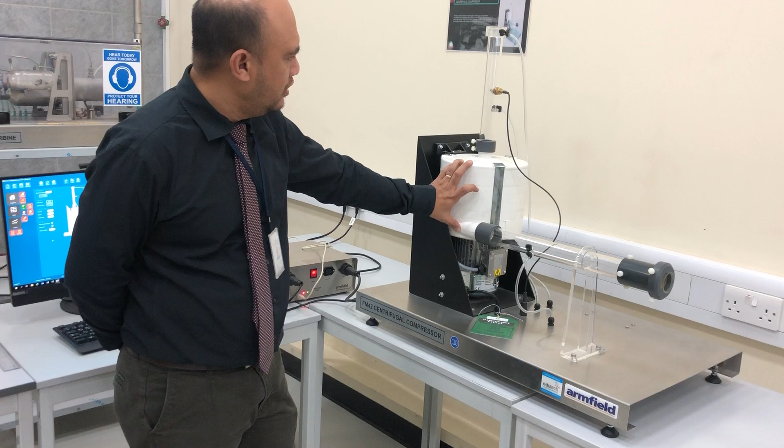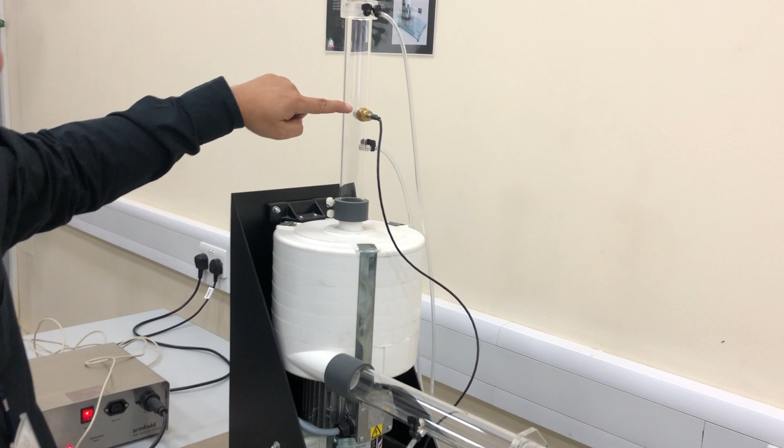So we'll be using this equipment. We have this 7-stage centrifugal compressor, with the inlet and outlet here. We have one orifice at the inlet, a temperature sensor, and the outlet aperture.

Of the compressor, we can use this string to control the exit, or the outlet of our compressor. So this centrifugal compressor is interfacing with our software here.

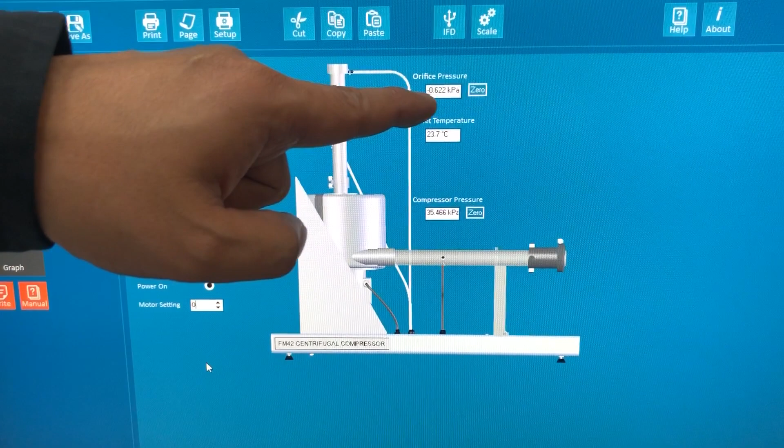This software can control the compressor as well as take the reading or data provided by our equipment. As you can see, you have the diagram where you can get the orifice pressure at the inlet, the inlet temperature, and the compressor pressure inside the 7-stage compressor.

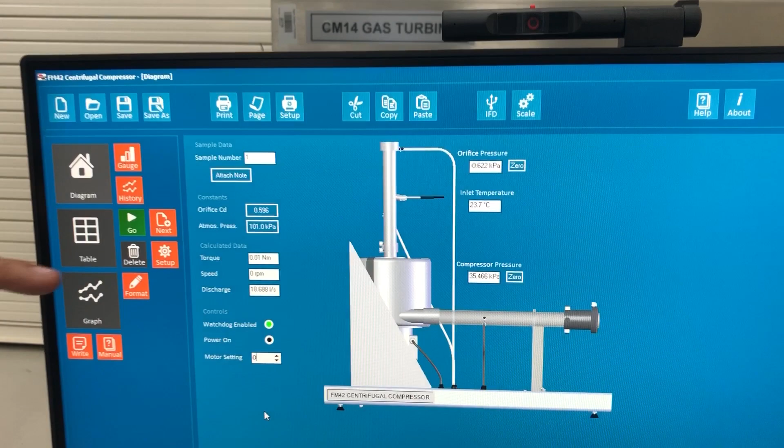Then you have here the torque, the speed, and the discharge in liters per second. So everything will be given by this software.

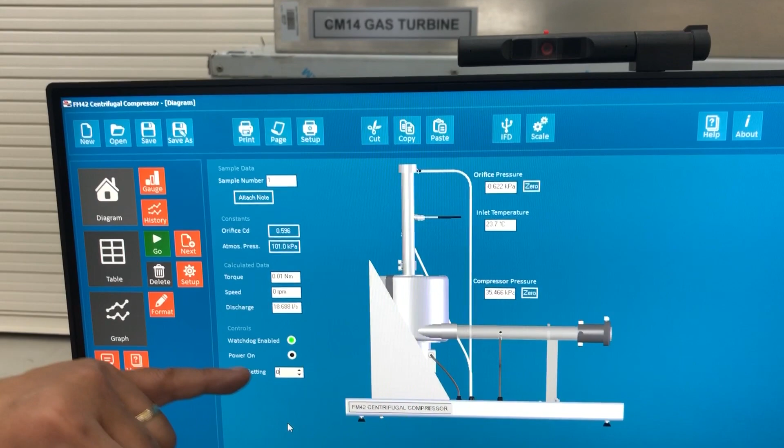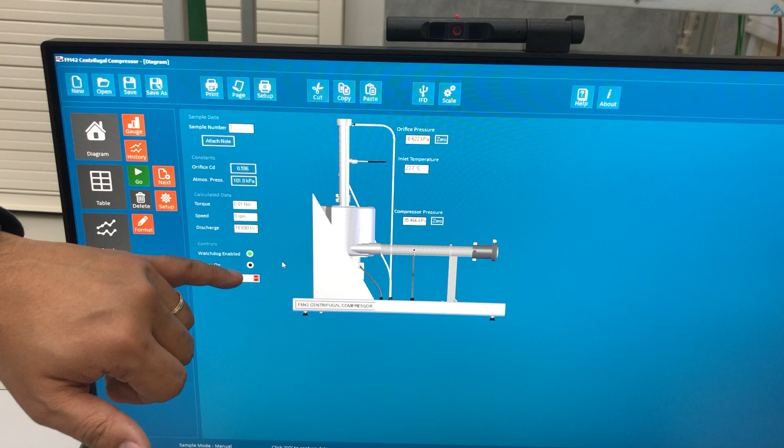So also the control. First, as you will see, watchdog enabled is green, power on. So in switching on the compressor, you need to press this one. Once it is on, black dot means the power is on. Our equipment is in the on position.

Now the motor setting will set the speed of our compressor. So let's try it at 100% running.

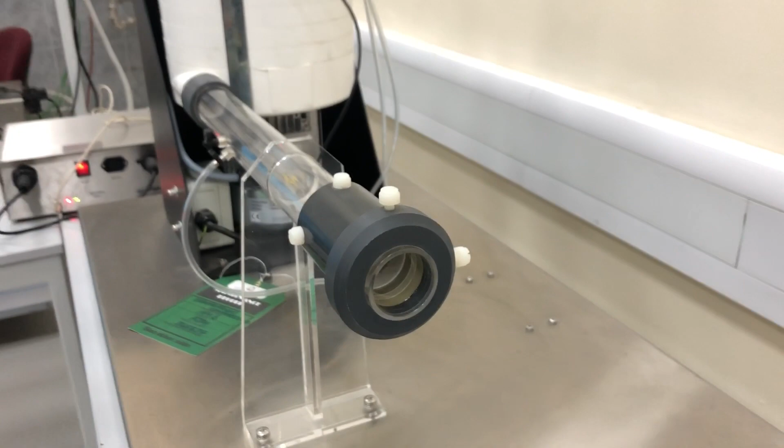So our aperture is fully open.

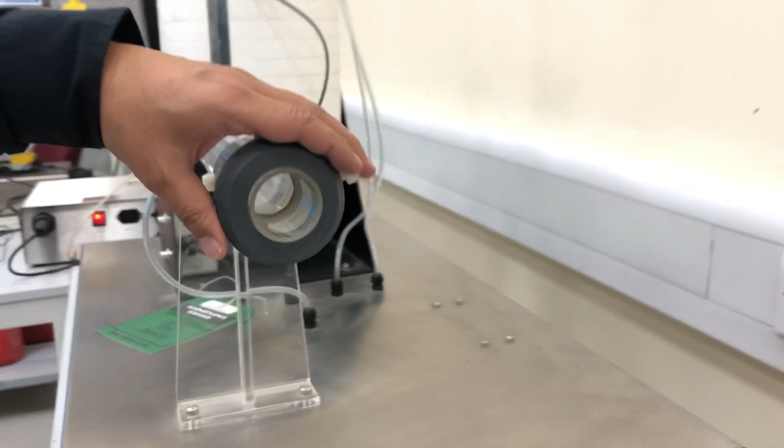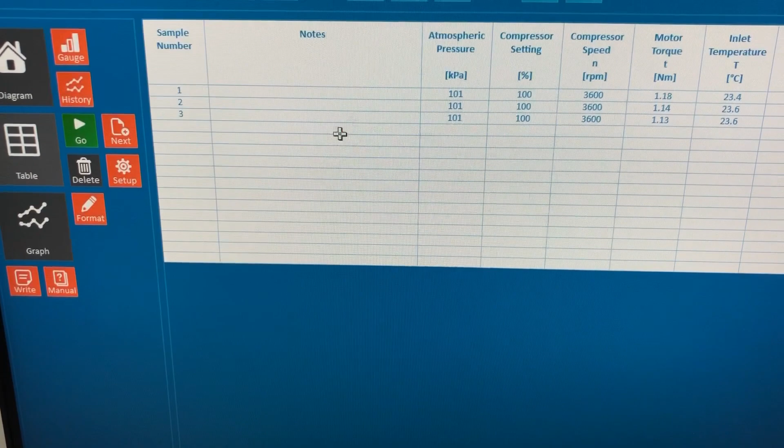Now on the software, you have here the green button where you can take your reading. By pressing this as go, you can take your reading here on the software.

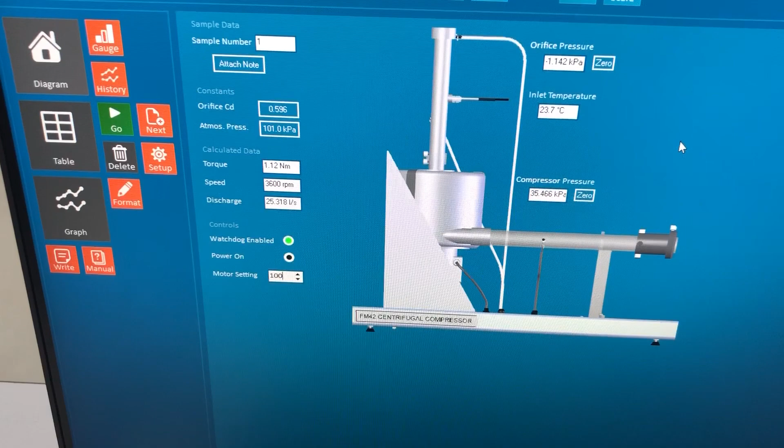So let's start taking the actual reading of the experiment. First, set the compressor speed to a maximum of 100%. So we are now at 100%, but we will not record the flow rate yet. Next, fully close the outlet aperture to give a minimum flow.

So where is the aperture? This one. So we will fully close it. Once it is fully closed, it will give us a minimum flow.

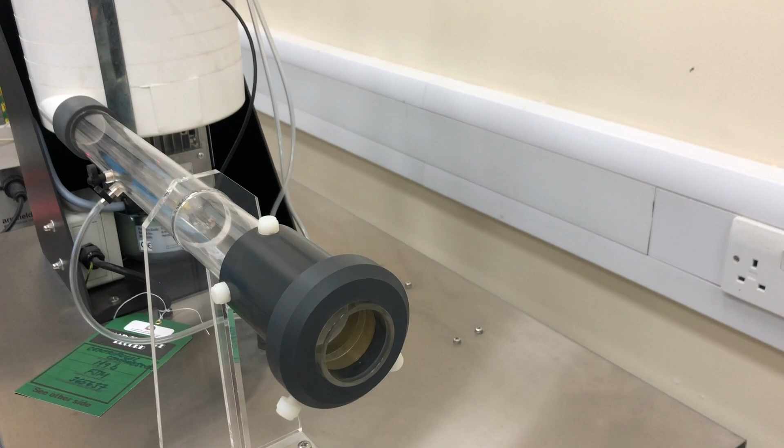Now click the button on the toolbar to record the sets of readings. So sets of readings: 1, 2, 3, 4, 5 sets.

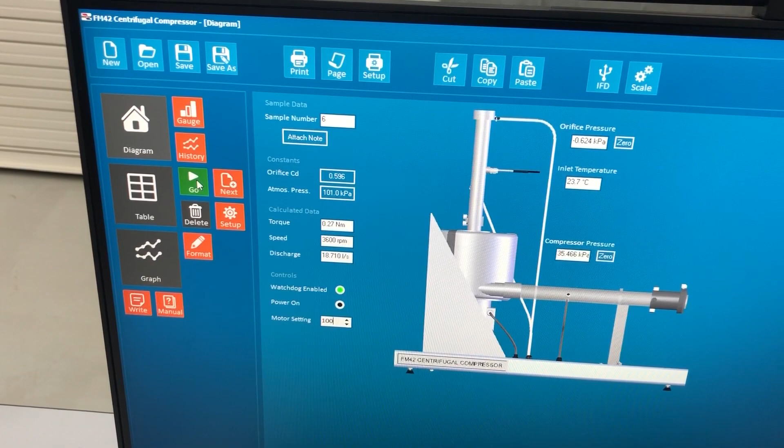Now we will select incremental values for air velocity that will give us 10 to 15 individual readings, up to maximum velocity.

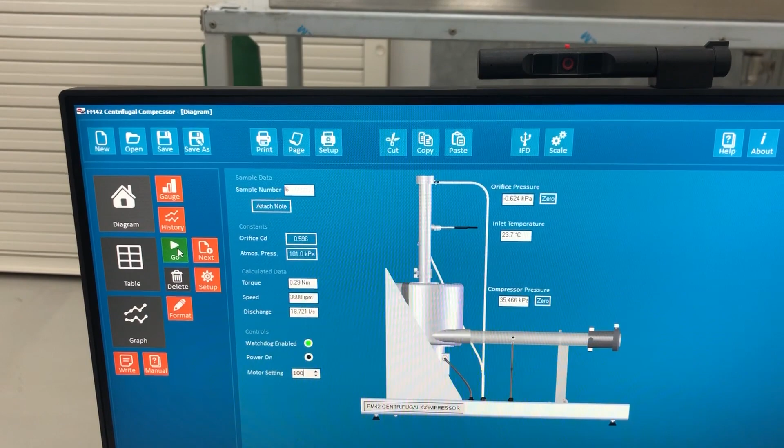Now, open the aperture to increase the flow rate for the first increment. Then click the go button to take the sample. Then repeat for each increment until the aperture is fully open. So let's go to the aperture and open it.

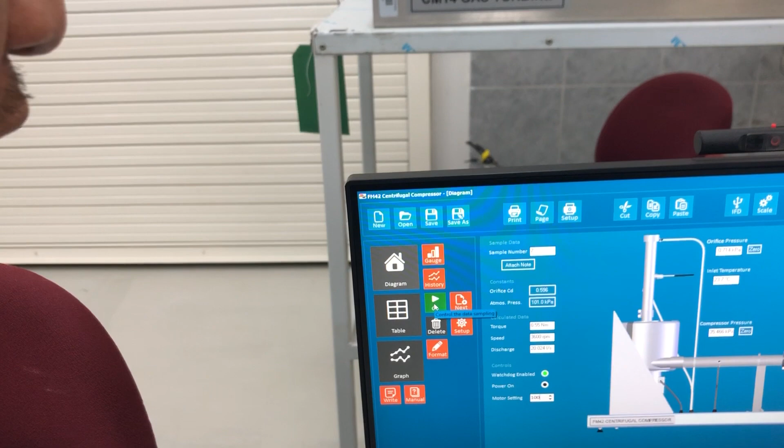So we open the aperture partially and we take the sets of readings. Let's say 1, 2, 3, 4, 5. Then again open the aperture.

Then again open the aperture until it becomes fully open. Until it becomes fully open, then take the reading.

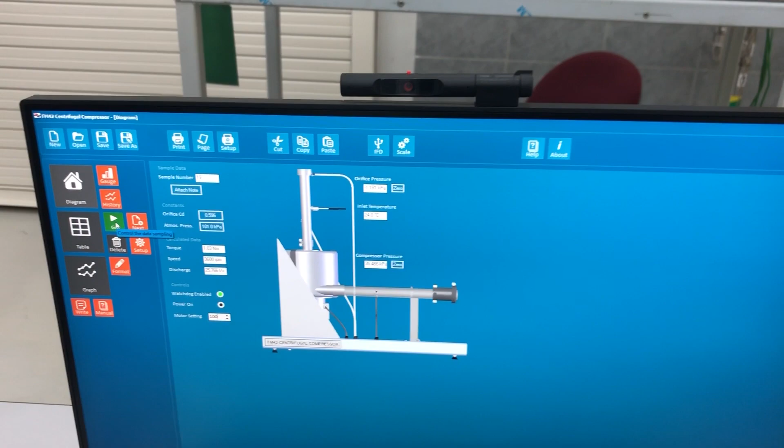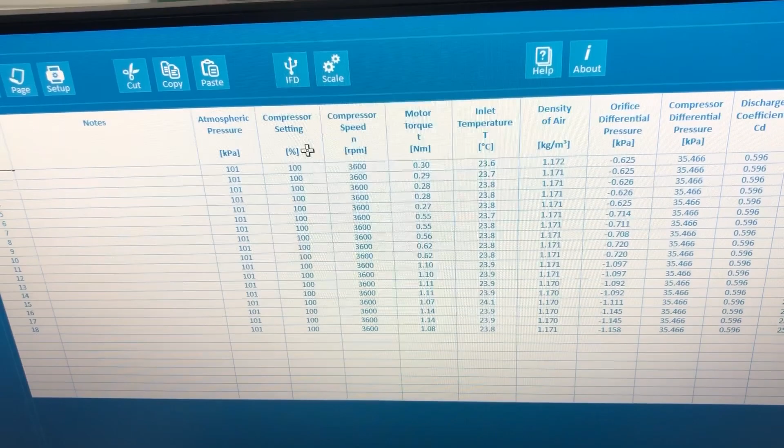So after completing getting the sample, you can take this table here. This is the sampling number. You have the atmospheric pressure given. The compressor setting at 100%.

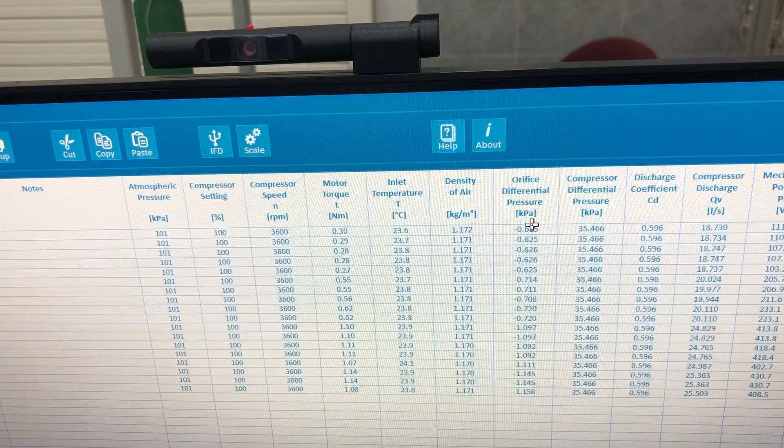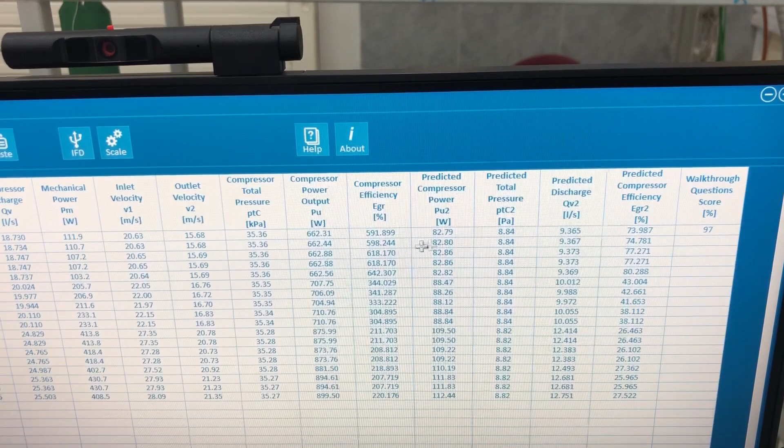Compressor speed, the motor torque will be calculated by the software. The inlet temperature, the density, differential pressure, discharge, the mechanical power, the inlet, and so on. So it will give you a complete reading: compressor efficiency, predicted compressor efficiency, and so on.

Then save this one. We can save it as an Excel file.

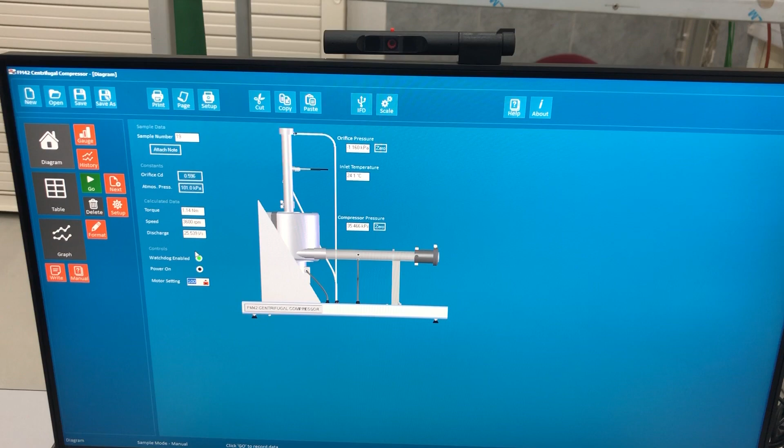And you can plot the graph according to the given on the lab sheet or the lab manual. So compressor efficiency versus predicted compressor efficiency, or the discharge versus compressor efficiency. Just read the lab sheet or the lab manual, it will guide you how you will plot the graph.

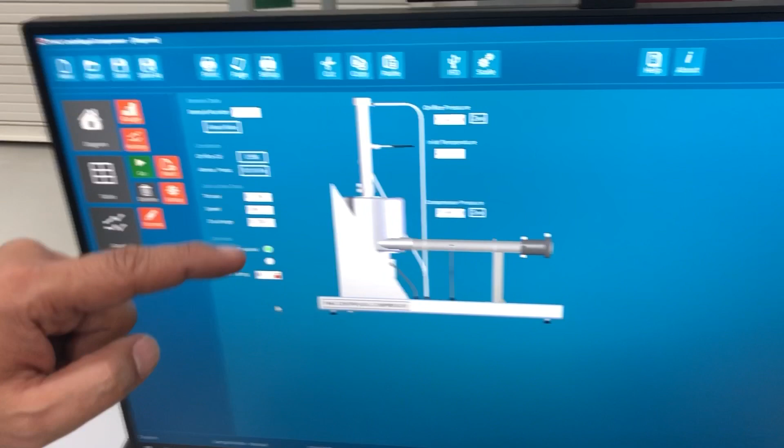So this is at constant speed. We can try it at 80% motor setting. So we tried it at 100%. You can try it at 80, at 60, and so on until 20%, 60, 40, if time permits. But the procedures are the same.

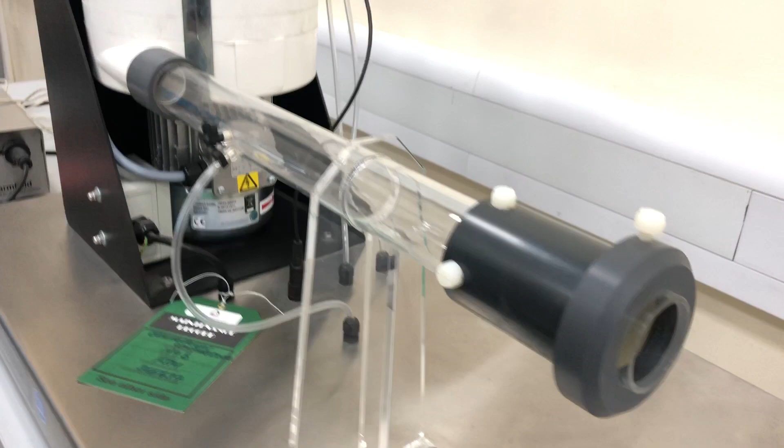For example, you set this as 80%, open the aperture gradually, take the reading until it is fully open. So this will conclude the experiment on the constant speed characteristic of a centrifugal compressor.